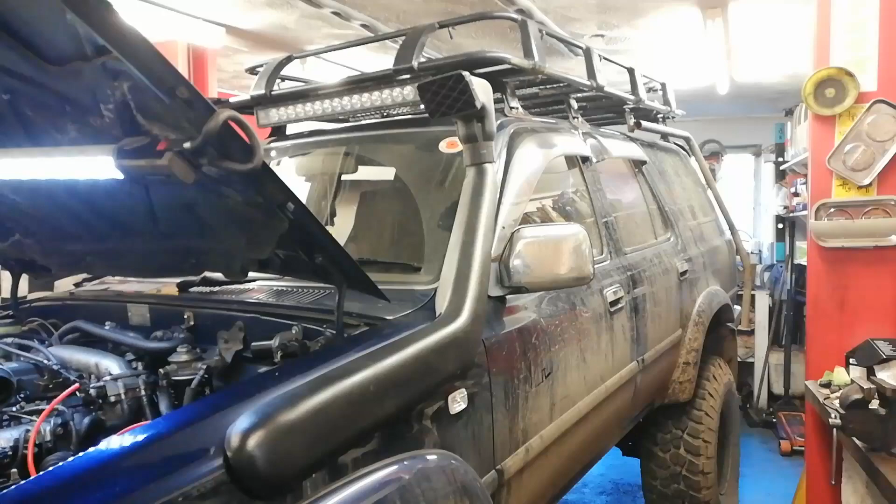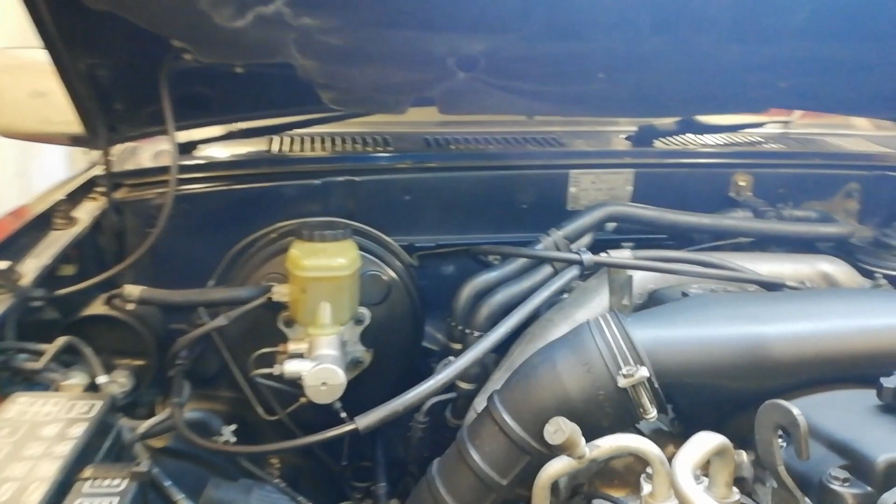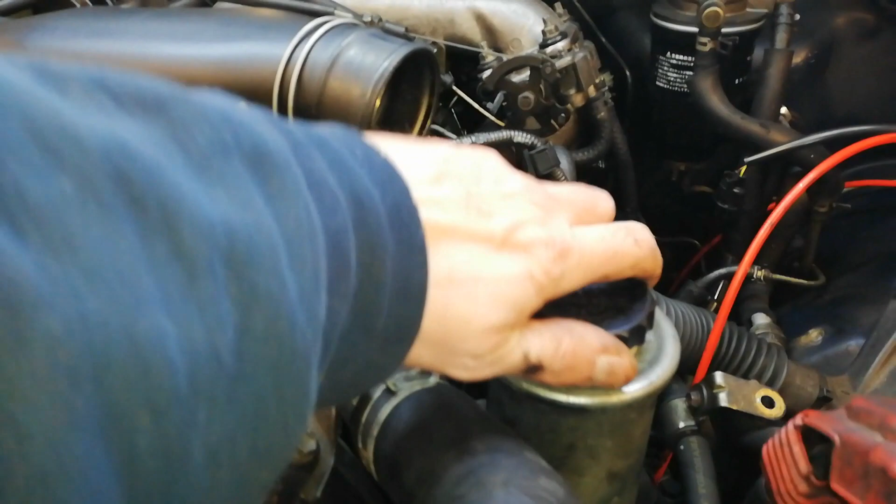So what about you? We have this big Toyota back in again. Did a head job on this not too long ago, and it's a nice shiny head in there, so no problems with that. But on the handover, we noticed he has another leak, and if we look at this, no power steering fluid.

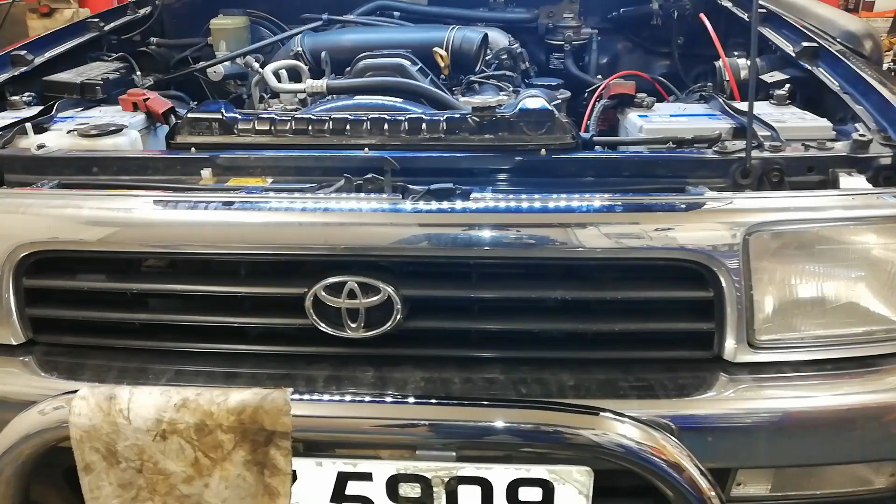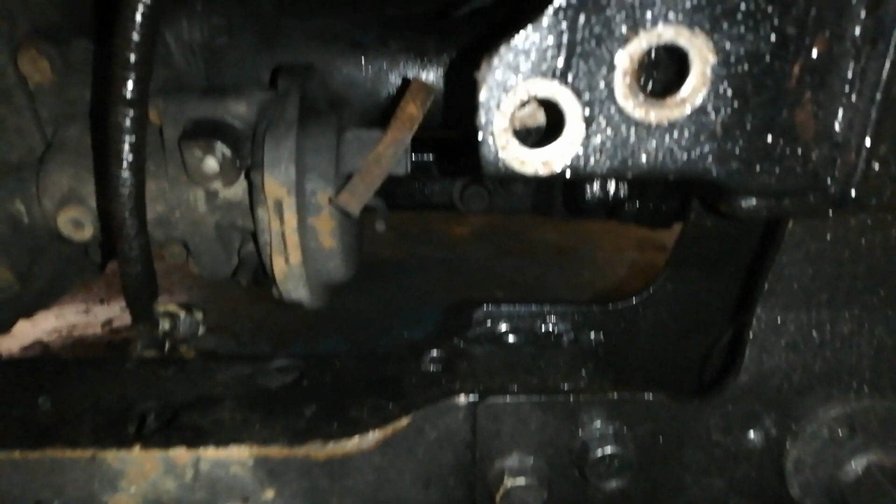So we'll see if we can get you in below here and have a wee look. Let's see, get underneath here, get in there for this. So where are we? She's pretty wet with fluid everywhere, and you can see it's just making a mess.

On the handover, I wanted to give it back to him. I showed him this, so he's brought it back and wants it done. Quite rightly so too.

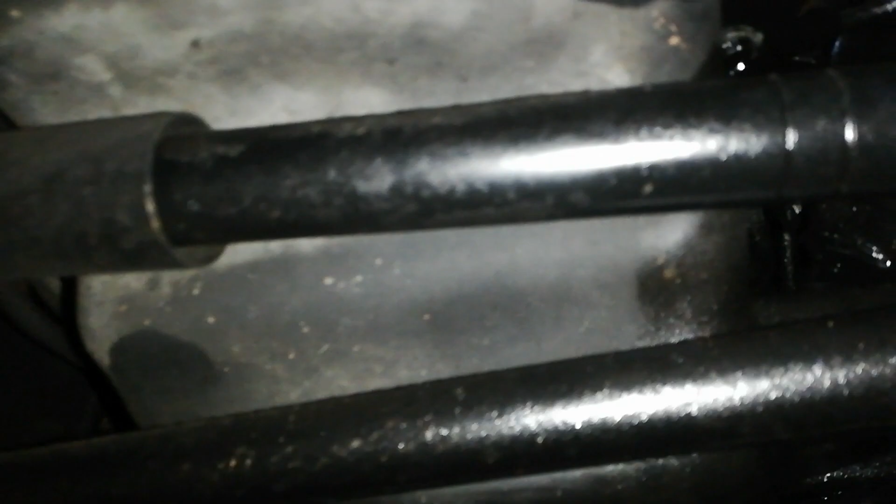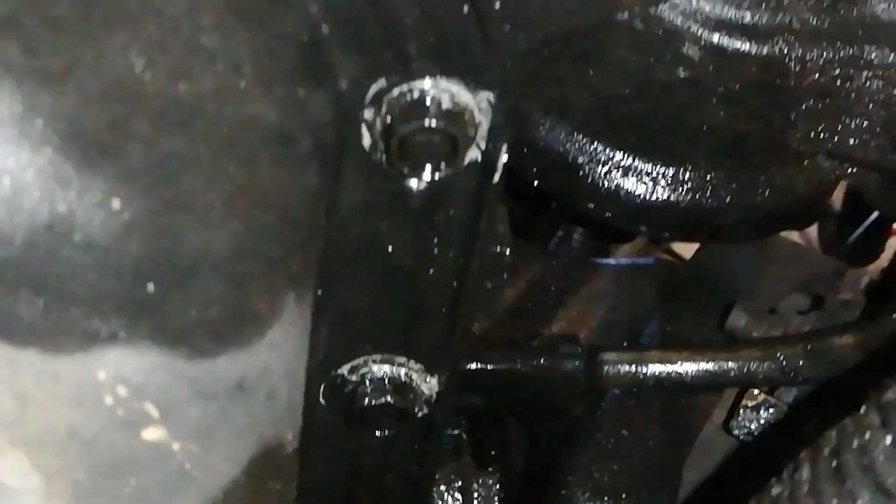If I can get this out of there. So where are we here? That's about as much as I can get you in there. That's the back of the power steering pump. Let me see, you see we drip there, that's the back of the pump. So the pump is driven from gears off the engine, it's not a belt or nothing like that, it's a direct drive, and it leaks out the back.

There's a wee seal on it, so we're going to take this pump off if I can keep that in shot. A few things to strip away, and we'll see how it goes.

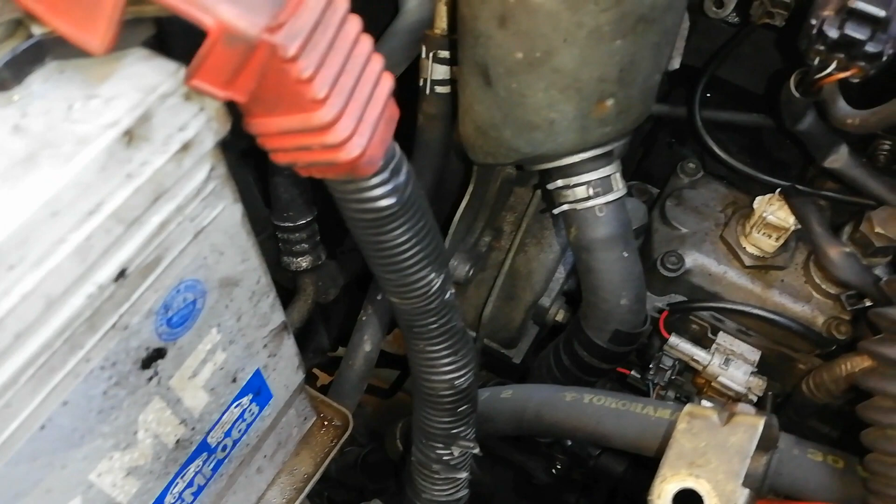It's back on top, and while we look at this here, there's a few pipes, as you'd imagine, to take off. So that one there from the reservoir, we'll just take it off completely, get it out of the way. This pipe here...

That goes onto a banjo, so it loops round. And trying to ignore that dopey red breather pipe there that I think the owner put in, for his diff breathers. There's just no rhyme or reason for that at all.

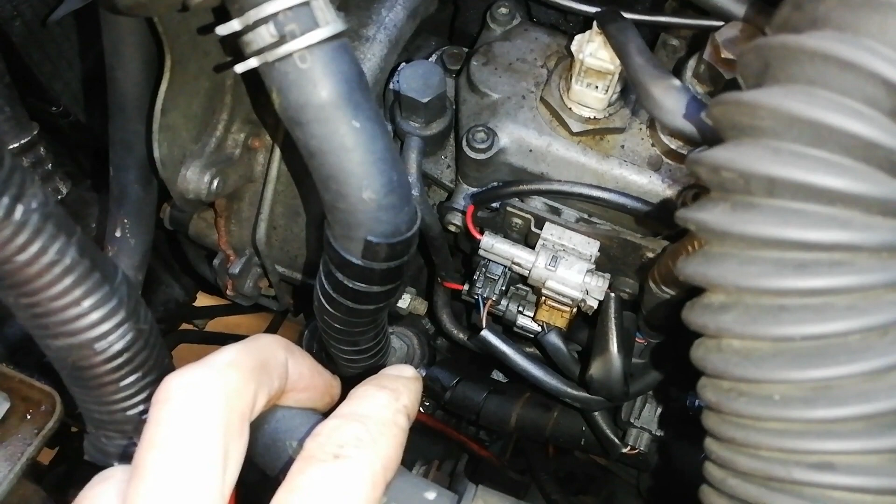Anyway, so down in there, if you can see, that's a banjo where this Yokohama pipe goes onto. That's the high pressure side, this is like the low pressure side, so that's just coming out of the bottom of the reservoir. There's another pipe on it over there, but that's for return, so we don't have to touch that.

We'll just keep this reservoir in situ, I think. All this is done from underneath, and we'll get this pipe here off first of all. Okay, so that's our feed pipe removed there. Easy enough, just a couple of spring clips from the bottom there and here.

So down there, have a wee drip tray below so you'll lose out whatever's in there. Makes a bit of a mess, but there you go. So our next one is this high pressure pipe.

So it's this one I have my finger off, and it curls around and goes onto a banjo. Now the thing about that is it screws into a boss, which in turn screws into the pump. So if you try to just loosen that with a socket, it'll just loosen the boss. So you need to hold the boss, and you can't do it normally.

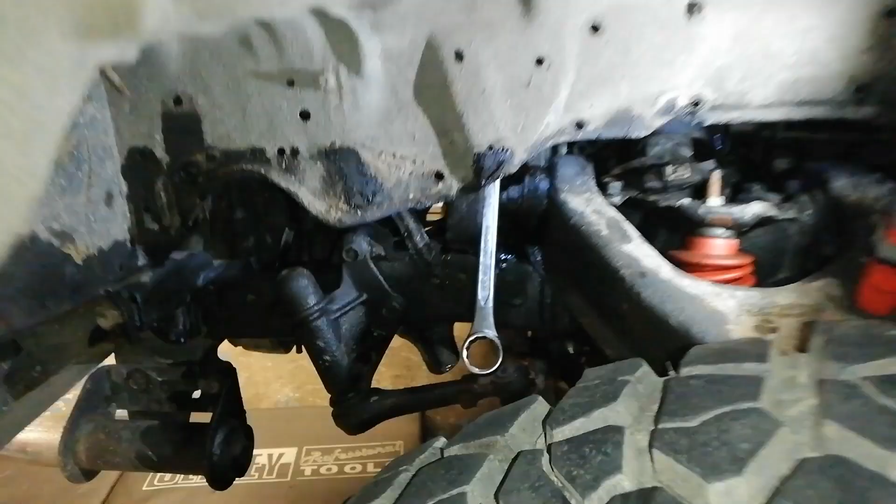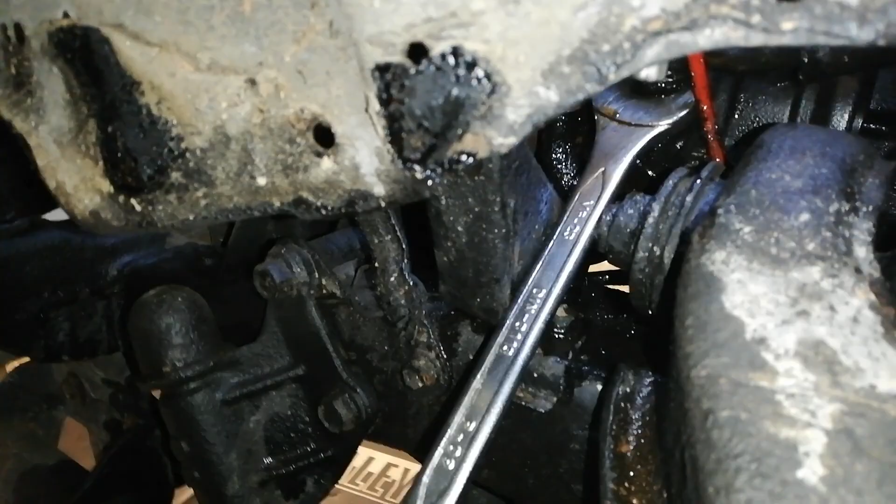It is doable though, no big deal. I'll just show you if I can get the camera in here without it going mental. I'll just see if I can show you here. Is that going to show you? No, right, I'll need to...

I'll get you in here. Okay, gonna be a bit shaky, this is all in the name of getting you in here. So have a look.

So I have that spanner jammed against the suspension, upper wishbone bolt there, and that's a 24mm on the boss, and it's a 17 on the top of the banjo there, and that's a better view.

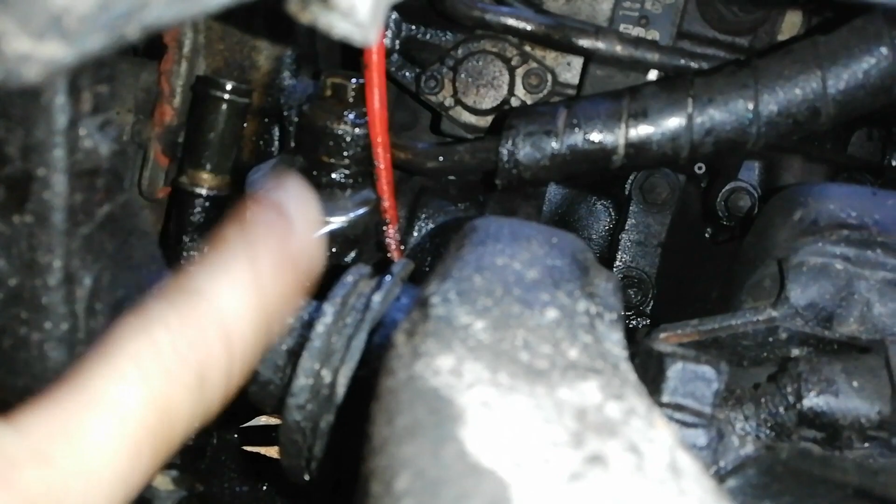So that's the high pressure pipe coming down. It's just a spring clip now, but these can be very tight, and you need to have this well held. So just using the rest of the parts of the Jeep to help me along with it there, and we'll have a big half inch extension going onto that.

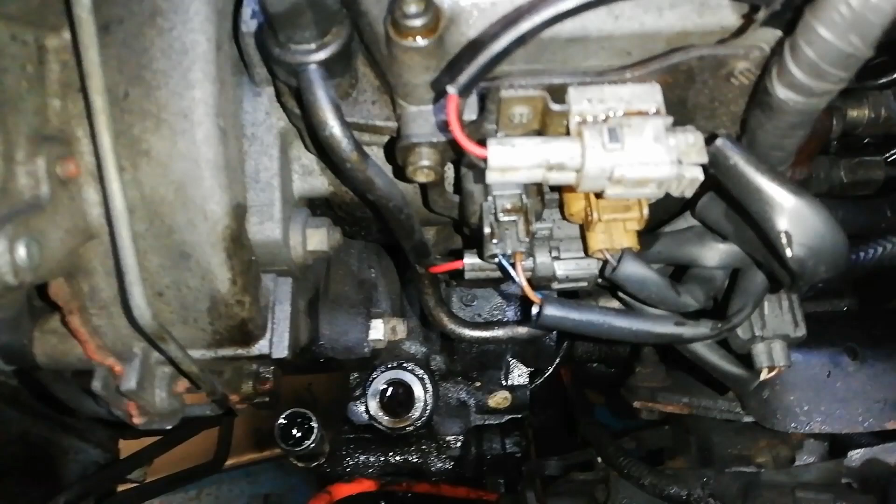And with that held, that'll come off dead on. So that's our high pressure off, and that's our banjo fitment, which I've just curled up and out of the way. That now reveals the top of our boss there, and then we'll have a nut here which is now pretty easy to access.

There's one directly opposite it, so we get that from below. There's a body earth strap below which goes underneath this and will hinder the pump coming out. There's a few chassis looms in the way too, so we'll move them out of the way and take those two nuts off to get this thing on the bench. But that's basically it for removal - not too bad at all.

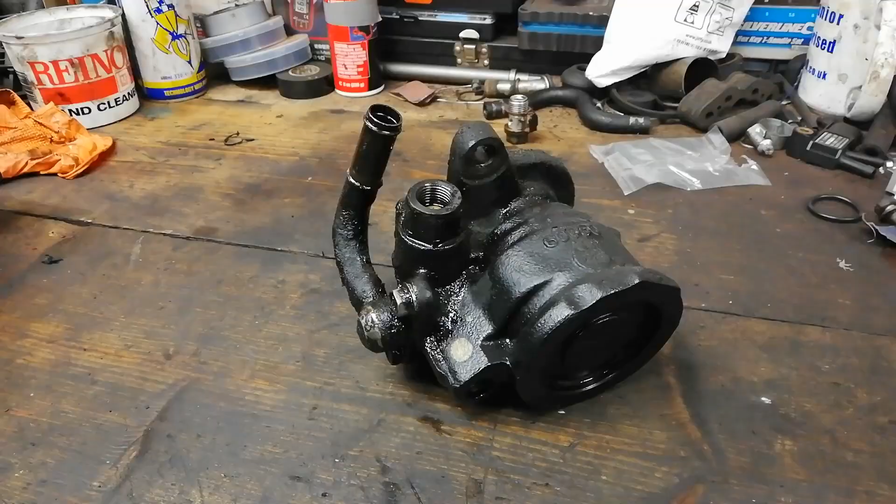So here's our power steering pump out, taken from the bottom. You might have to jack the car up a wee bit and turn the steering to the right, just to get the steering linkages out of the way, and she comes out the bottom.

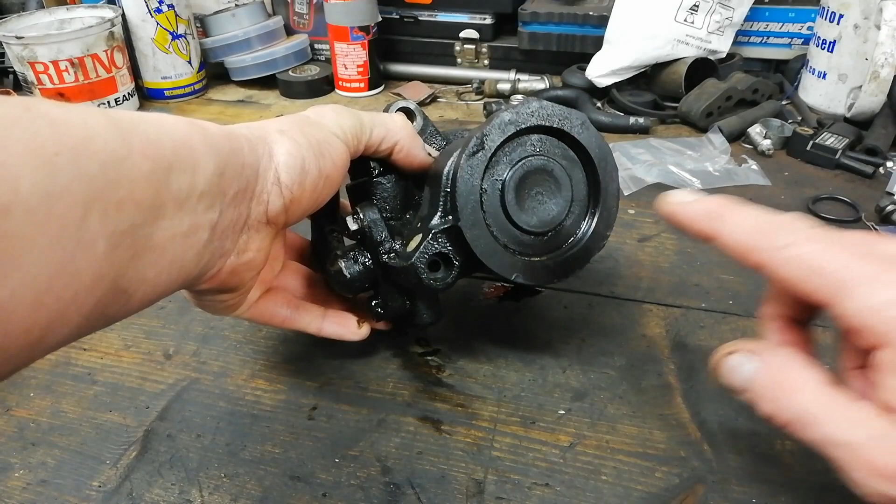So where these leak from is this back plate here. It's held in with a spring, like a big C-clip, and that's how it's driven off the engine - there's a blue seal on there. You can get a rebuild kit for these, but I'm not going to completely rebuild this.

There's a seal in here, but that wasn't leaking, so there's two seals - I think it's two, we'll see in a wee minute in this back bit here, and we'll clean it up first. So first of all, before I do that, this is the kit you can get.

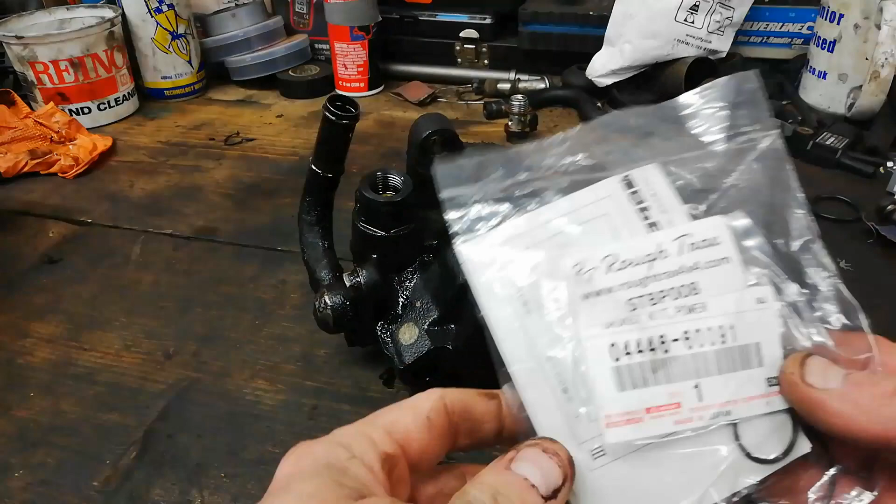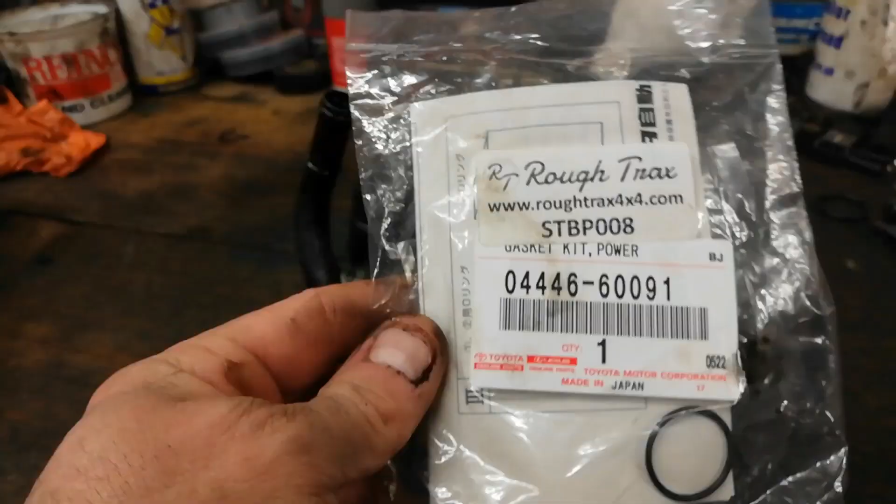It's a genuine Toyota kit, Toyota Motor Corporation, and I get it from this UK supplier, Rough Trax. You can get it from Toyota, and there's a wee schematic in it that shows you what seal goes where, plus a bearing, a new C-clip, and all sorts of wee O-rings. It's these two big main O-rings we'll be interested in.

We'll have a wee look at this schematic as well that you get in it - genuine Toyota kit there. It's dear enough, I think that's about 50 quid, and we're not going to use half of it, but we need to get this leak stopped. So we'll crack on, give this a bit of a clean up, and we'll see what it looks like.

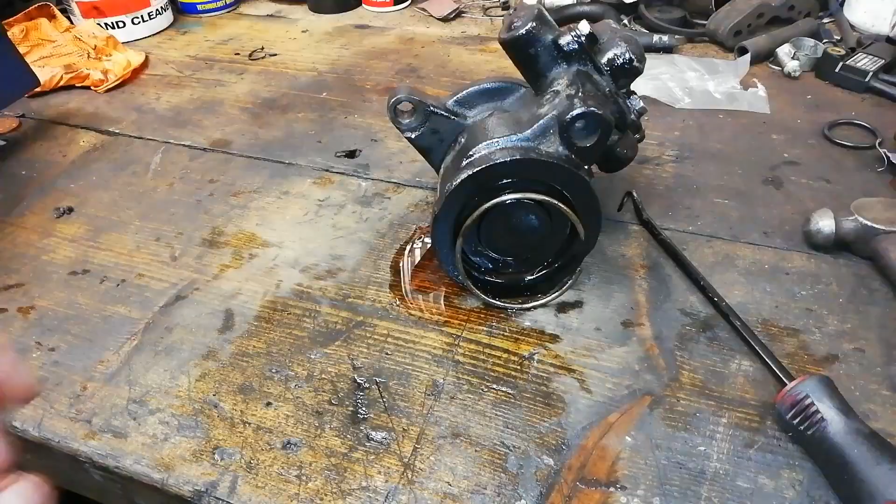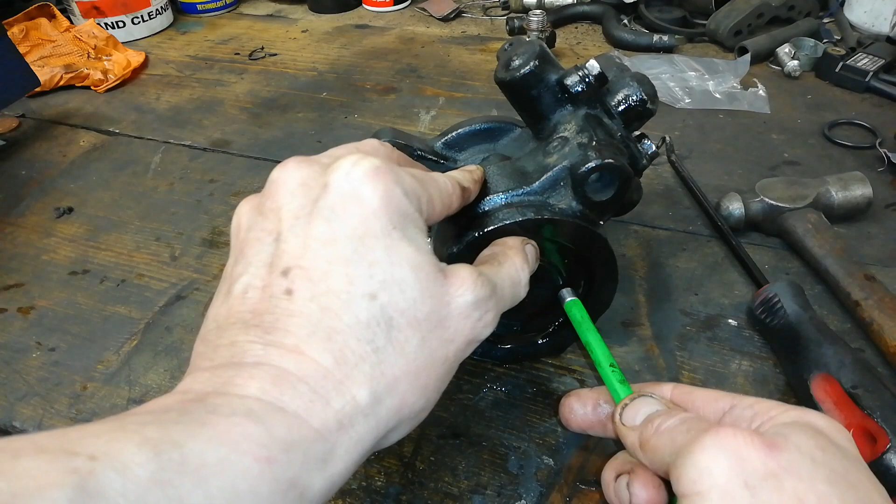Okay, so here's just going to show you how far I've got with this. I held that wee lugger in the vise, got a wee pick tool under one of these wee edges, ran it around, and that's that main ring off. Then I give it a gentle tap on the back, and this now loosens up so we can get that back plate off.

And with that, there's a wee spring clip - that wee spring clip sits in there, and there's one wee seal in that wee back plate. So there's a couple of other wee seals in here, as I mentioned, and we'll set that to the side. Make sure your bench is clean for this.

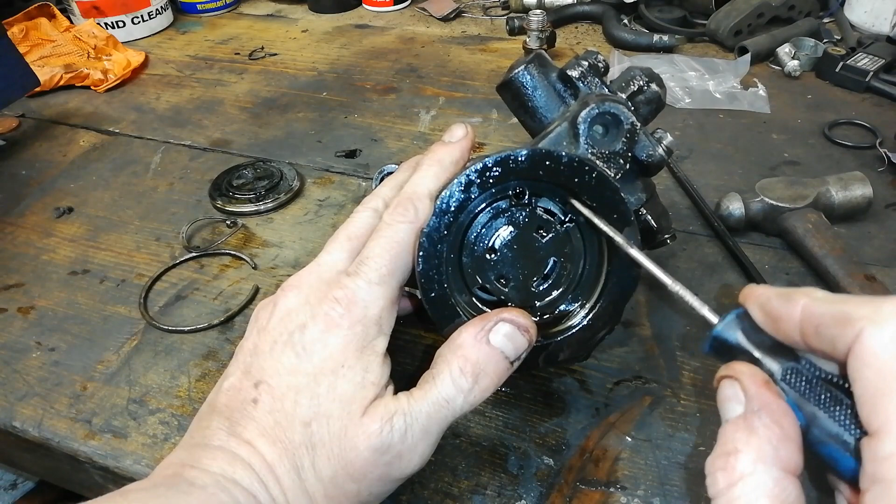So the next bit we need to take out is that bit there - it just pulls out, and we need to get a wee pick tool and see if we can catch it in here and in here, and see if we can draw it out. Okay, so just see if we can persuade this. There we go, there's just coming now. That's a job.

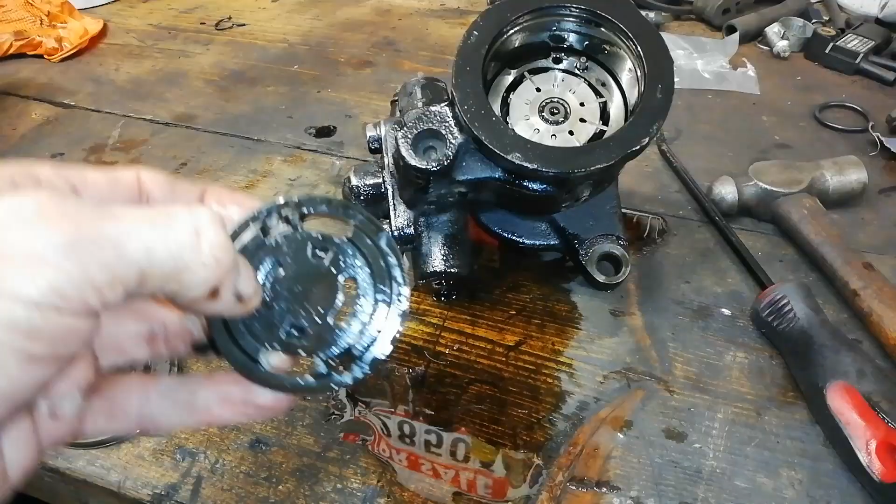So let's see, there's another seal there. Hopefully it comes up on camera - so that's another seal in there. Okay doke, right, so two plates out here, and we can see they fit together quite nicely. There's a spring normally goes in there, and they fit nicely together - so that's the innermost one, and that's the outer plate there.

So what I'm going to show you now is this. What I'm doing here is not a complete rebuild - this is just to stop the thing from leaking.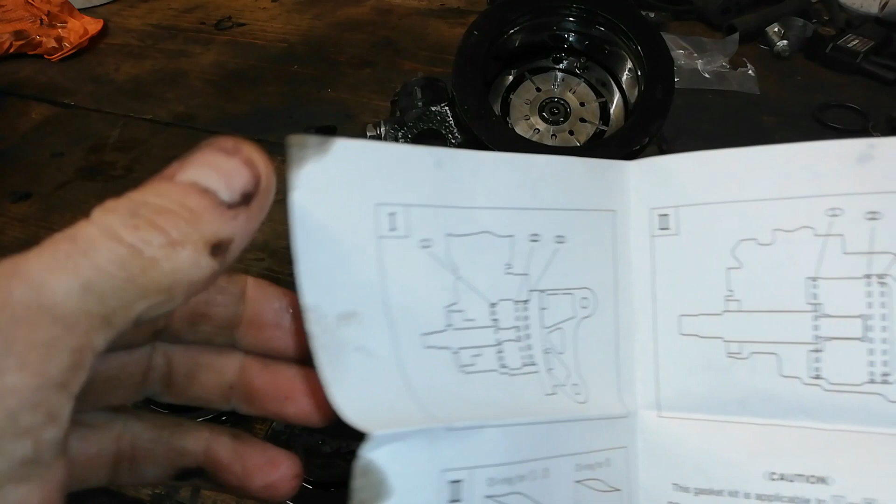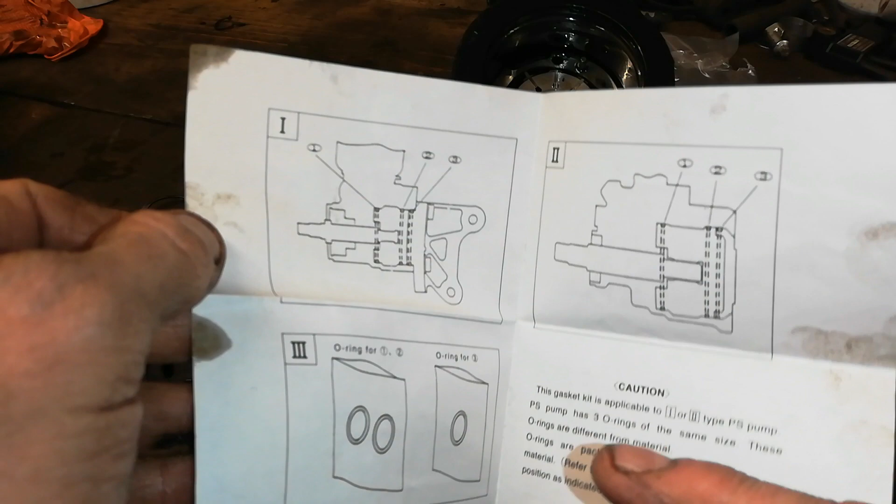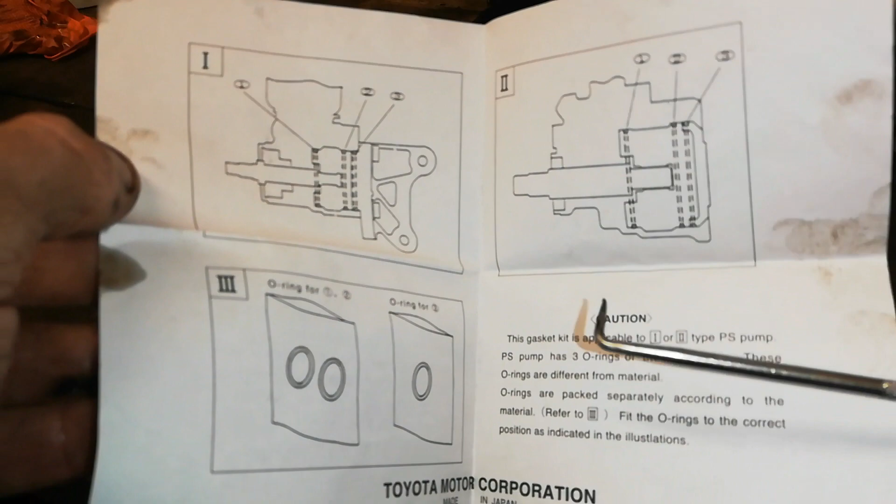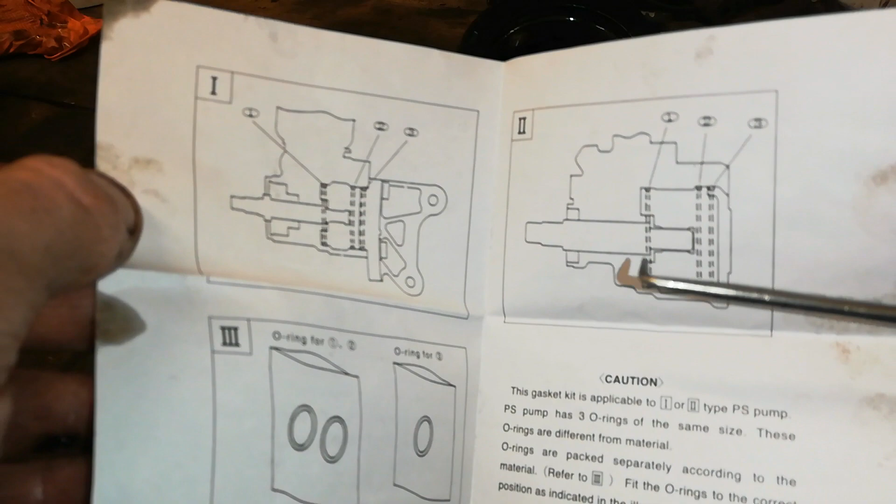So in our wee kit we get this wee boy here, and it talks about you get a packet with 2 seals in it and a packet with 1 seal in it. Now they're both the same size and all that, but they're made from different materials. From what I can gather, the rear seal will be number 3, which is the single one, and that one there will be number 2, which is one of the 2. So the other seal goes away inside it. Now I'm not going to take this thing right down, because you have to press the shaft out. The other thing to note is these wee fins in here are all worn in, and you can just about see there's a bevel side and a square side.

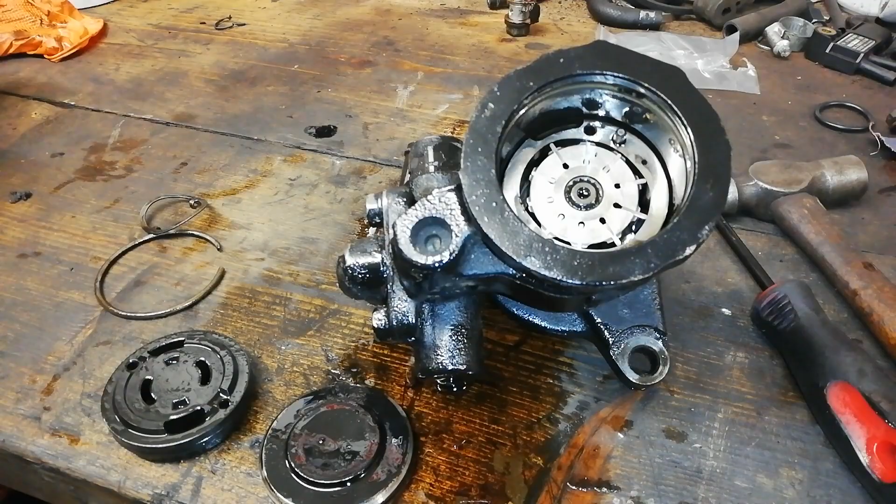So I'm not going to take it down any further than this, because all we want is this thing to stop leaking. So I'm going to use those 2 seals to do this. But what I can see from that wee drawing is that they're 2 different seals, made from different material, but they look identical. So we'll have a wee look at this kit here.

Okay, so we've got a bag with 2 seals in it and a single one. As per the wee drawing, I'm going to put this single one onto there, and one of the double ones, from the packet with the 2 in it, onto that one, and we'll put it back together again. We'll get a new one of those, and that's really all we're going to use, I think. We'll get those seals on.

Right, so we've got the seal on here, and we'll just give that a tap in, make sure the wee pins are aligned, and tap that down home. I already put that in, that's not the whole thing - I'm just checking it's fully home, because I can't get the pick sort of behind it there. So yeah, I'm pretty happy that's fully home.

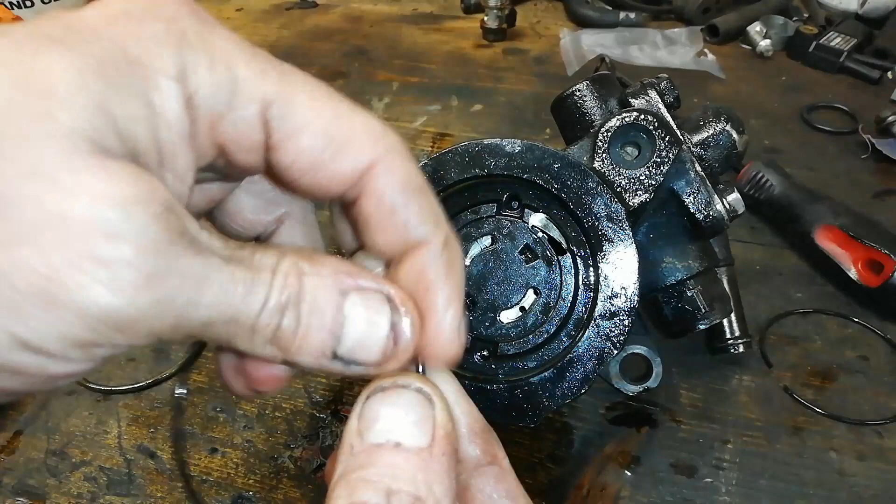Just checking there. So just to show you guys, the seals that came off just basically broke. They're really fine, they're tight, so you sort of have to nearly break it to get it off. And there's the other one.

Okay, the special seal at the back is like a silver color, a different sort of color to the other ones. The other ones are black.

So this cover plate - remember our wee spring here just slots in, just sits in there. If I can get it to sit, that's it. And then a good amount of ATF there, or power steering fluid, automatic transmission fluid. We're going to put in this, and that has no orientation, so we just offer that in nice and square, and we're going to have to give that a few taps there to get it into position. Okay, so there we go.

We used the new spring clip that was in the kit. We'll have that back plate on, and the new spring clip just clips into position. What I did there, I held that wee lug in the vise while it did that, and I just pressed it in with my thumbs, and then tapped it in with a hammer and a wee bit of a screwdriver just to help it in, and that's her.

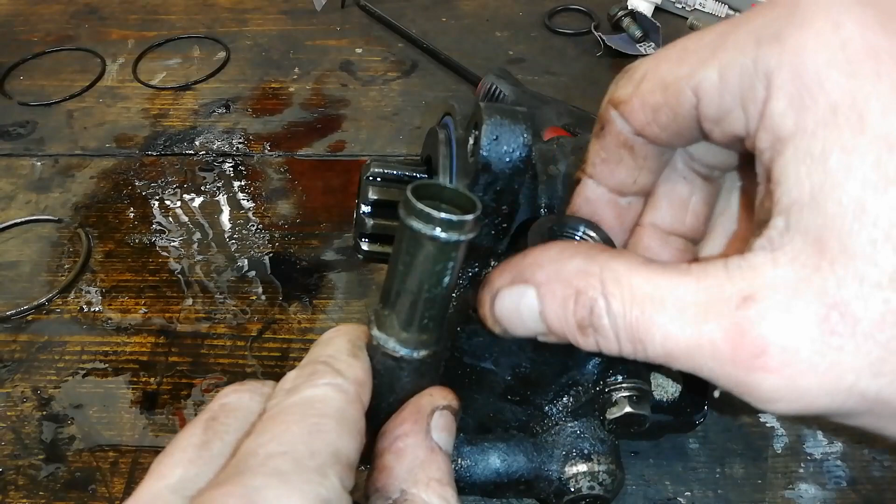But before we do that, we'll have to watch now. We'll have to remember this boss loosened up when we were taking the banjo off. So what I'm going to do, we need to tighten this, but I'll screw that completely out. There's another seal on here. Now this wasn't leaking, but I have to tighten it anyway, so I might as well just take it out. I'll just show you that.

We'll just unscrew it here, and there's a wee O-ring on here, and we may as well change that while we're here. I think there's one of them in the kit. We'll screw that in, tighten it up, then it's ready for the car.

Pump back in again, and all the pipes connected up. Good job, so far so good anyway. And we've filled the reservoir with power steering fluid with a fairly significant overflow, as you can see, but that's okay, our wee drip tray is still beneath there. There's power steering fluid everywhere underneath, so that will hardly make much difference.

So we're going to start the Jeep. The reason why you can't get much into it now, you might think they should have taken more than that, but it won't actually take much at the minute. So that's basically just filled that can there, so it's got nowhere to go. We've probably got a big air trap in it now, so we're just going to start the engine and see that level. I think that level will just disappear there. So let's see what happens.

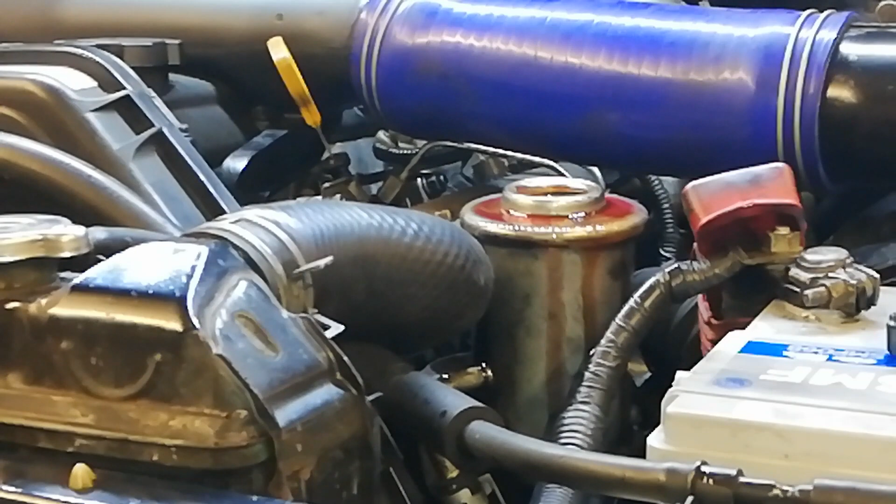So we'll give it a wee run for a while, and we'll get the front wheels back up in the air, and spin the wheels back and forward, turn the steering wheel, take it for a wee run, and then have a look at the level after that. Right, I've knocked the engine off there.

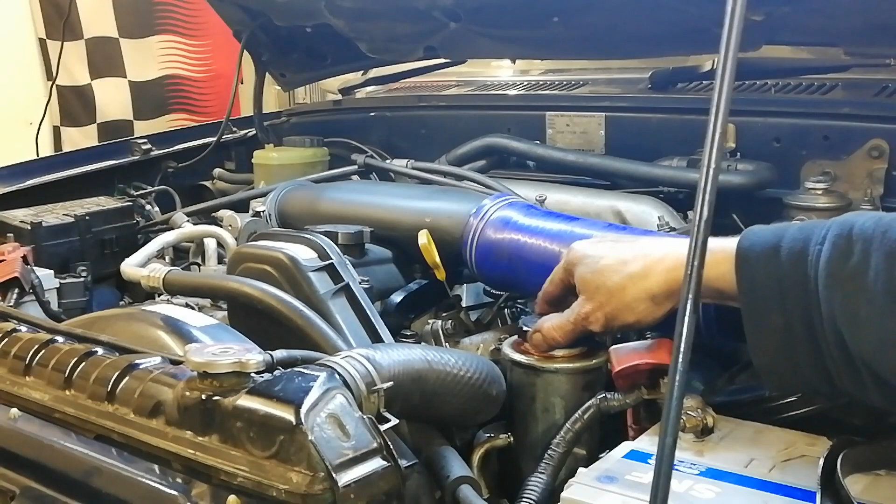So what's going on here is you can see the air in it. Can you make that out in the camera? It's all bubbly, so that fluid is full of air. What I'm going to do is just run it, knock it off, and let it settle down, and the air will come back out of the fluid again, back up into the reservoir and settle on the top.

So this can take a wee while now, and whenever you introduce a big air trap into this type of system - if you've come across this, if you change a steering rack or anything like that, you'll have buckets of air in this, and all it's doing is really just whisking the fluid up. So if I run this with the cap off, it's throwing it out and it's all foamy. So we just have to persevere, and I'm not going to film all that.

So I'm going to run the car, let it settle down, turn the steering from side to side just to get it through, but it's going to be a bit creaky. So before I give this back to the customer, I'm just going to have to persevere with this. Sometimes this can take a while to do, to get all the air out of it and get the fluid running through nicely. So there we go.

I'll have to give the underneath a bit of a wash just to make sure, take it up to the power wash, just to make sure that the seals have cured that. I'm pretty confident it has - there's a number of these I've done. The wee seal kit is expensive for all you use out of it. It's not a full rebuild by any means. If you need to do a full rebuild, then that's a different matter entirely.